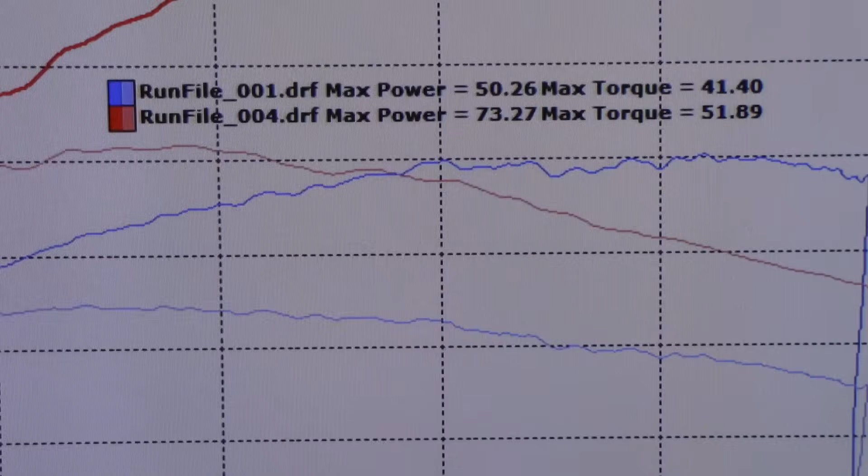But anyway, so then I decided, okay, I'm going to try 4th gear, and that is number 4, and whammo, 23 to 24 horsepower and 10 foot-pounds of torque. So that's how much this thing is shut off from the factory in 5th gear. Can you believe that? So I'll back it out.

Okay, so now you can see the graph. That's the blue line in 5th gear. Then the torque is the faint one way down there, and the red line is in 4th gear. 5th gear blue line, red line 4th. Look at that. Alright, well let's get on with what we're going to do today - every intake system known to mankind, test it with a stock bike. Pretty cool.

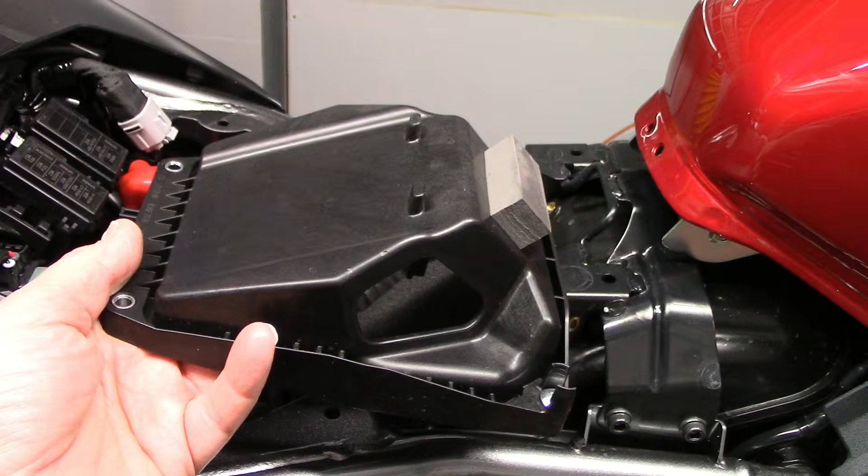Okay guys, it's a little bit of a pain. If you have a helper, you can pull the battery back a little bit. The front screws are captured, see they won't fall out, you just got to make sure they're fully unthreaded. And you can get a long skinny Phillips down in there without wrecking the screws. Otherwise take the battery up. But we were able to weasel this battery back, get it up just right and get it out.

The snorkels, actually I was able to push with a brand new wide screwdriver and collapse them and kind of yank on them, pull them out with the cover, filter cover still completely intact. So let's pull this foam out like everybody seems to do.

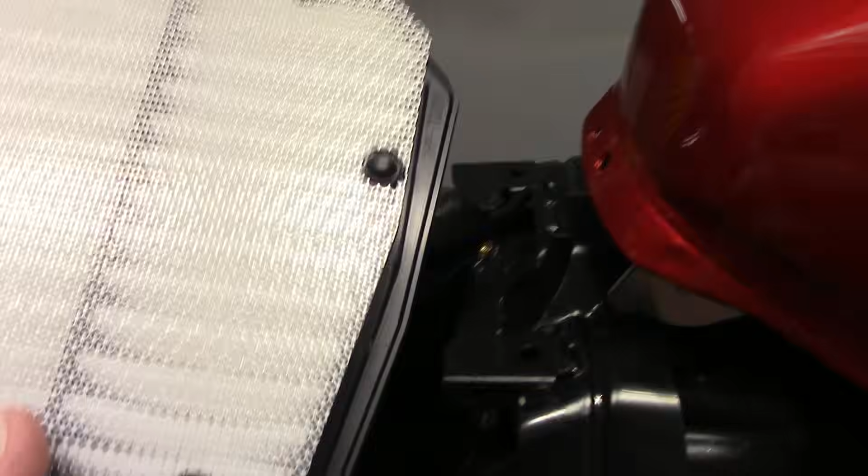Let's look at the stock filter. I'm going to take this screen that's also supposed to be a horsepower killer, nip these off, pull them off, and then nip them off so no debris can get in. Then we'll put this back in with the cover, no snorkel, and make some pulls.

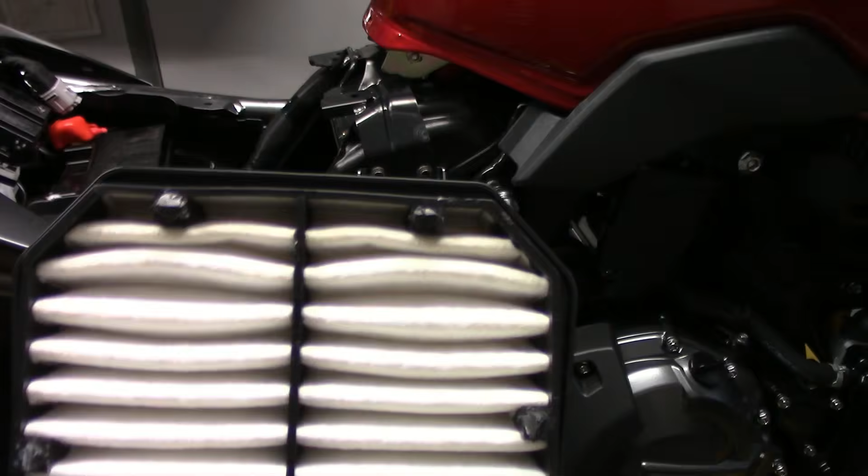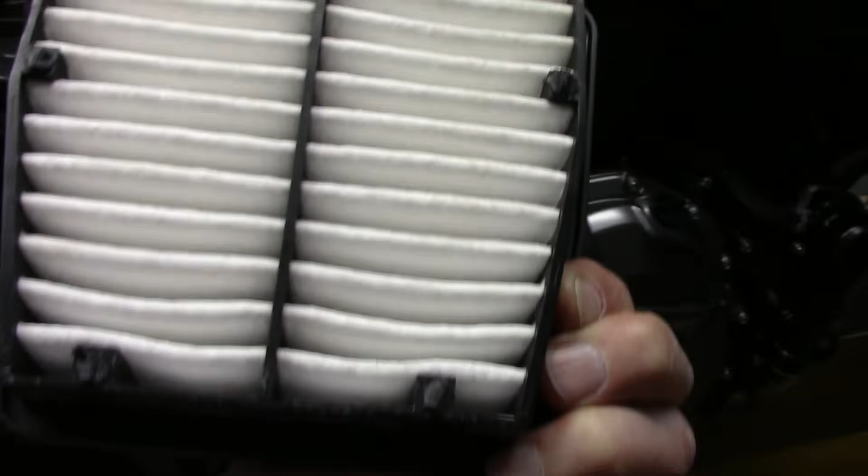See what my bike does here at 4,500 feet. Okay guys, here's the stock filter back, got the screen removed. I don't even think you need to nip those off, they look pretty clean. You just grab a pair of pliers, have somebody hold the filter forward, and roll the screen and it'll pop off those melted rivets. But I went ahead and snipped them off with a pair of diagonal pliers and blew it out a little bit.

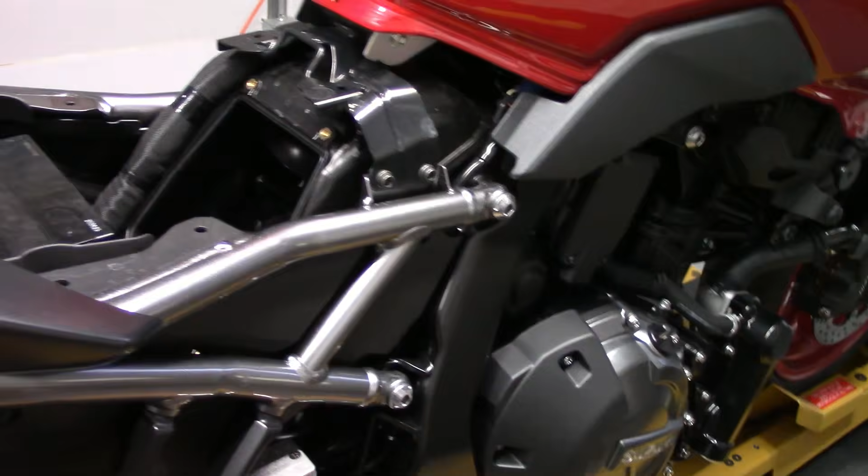So we're going to stick this back in with the snorkels removed and make some pulls. Let me get it together and we'll get at it. Okay guys, well we got the room about 73 degrees right now, should be pretty good range there where it liked it earlier. We got the air filter and air box just like I showed you a minute ago. So we're going to go ahead and make 3 pulls right now and let's just see what the thing does. 4,500 feet. Here we go.

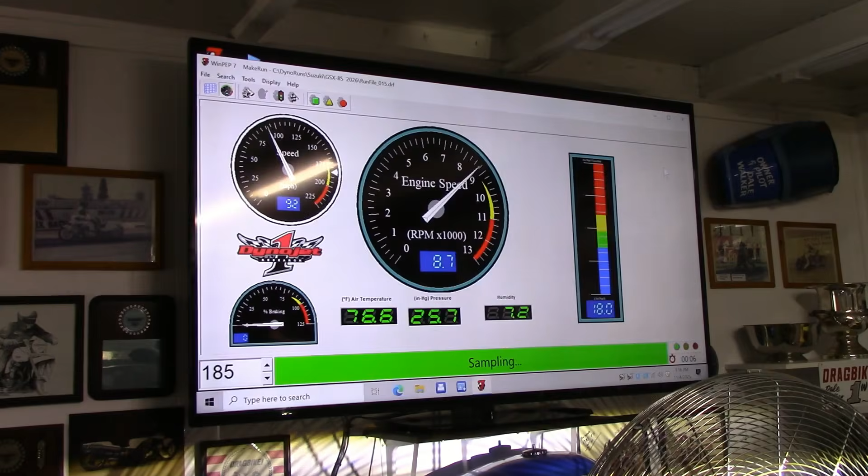Okay guys, so you look at that and say, wow, number 4 is one of the best pulls earlier with very similar conditions. It was 76 degrees in the room. When I got done with these pulls, it was 75.8 degrees, and humidity right on the money, 11% earlier and 11% this time in the room.

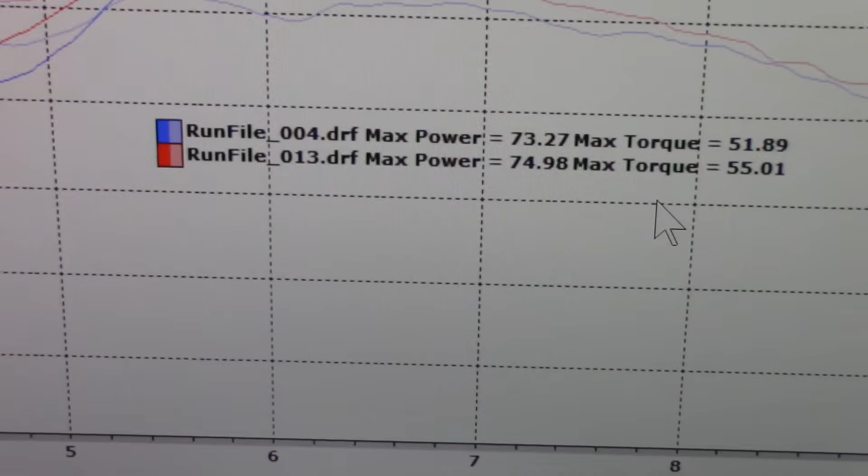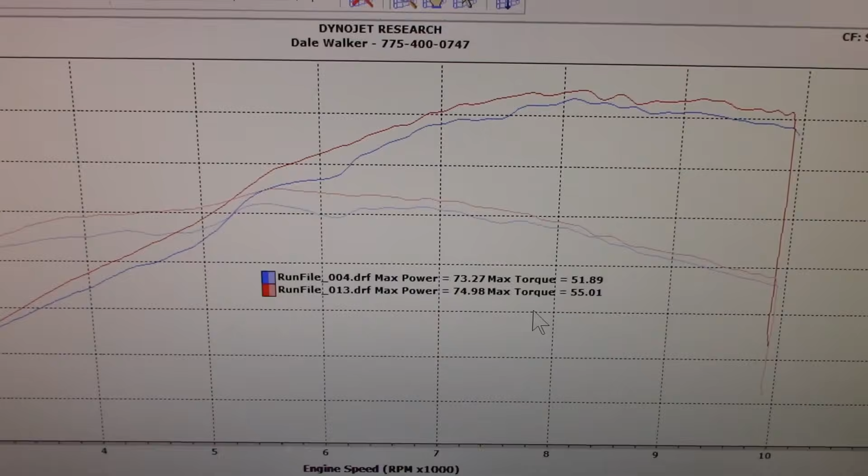So you look at those numbers and say, wow, the thing only made like whatever, right? It's still a pretty good gain right there. But remember, this is zero tuning, throttle blades still aren't open all the way. But look at the graph, so you go look at just peak numbers - that's not the whole story by any means.

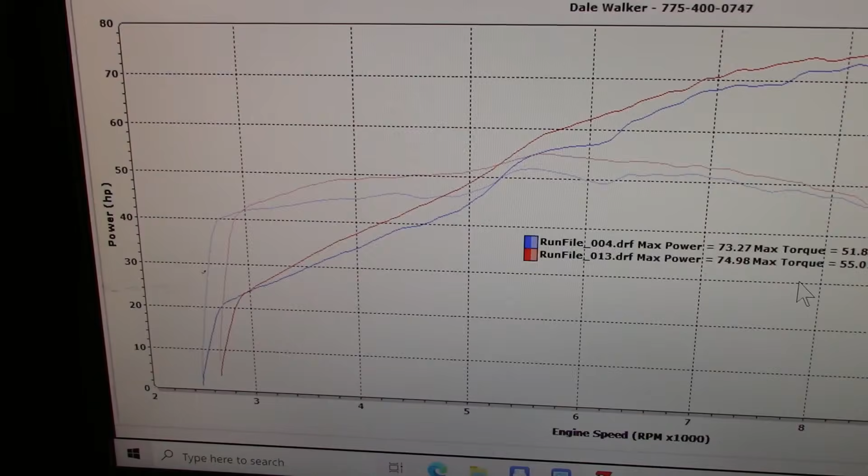So the red line is just now - that's with the stock filter still in it, with the lid on, no foam on the back, screen removed in the front, and the snorkel's removed. That's all this is. But look at the horsepower gain down here - that's about 5 horsepower, that's about 6 horsepower, that's at 5 grand.

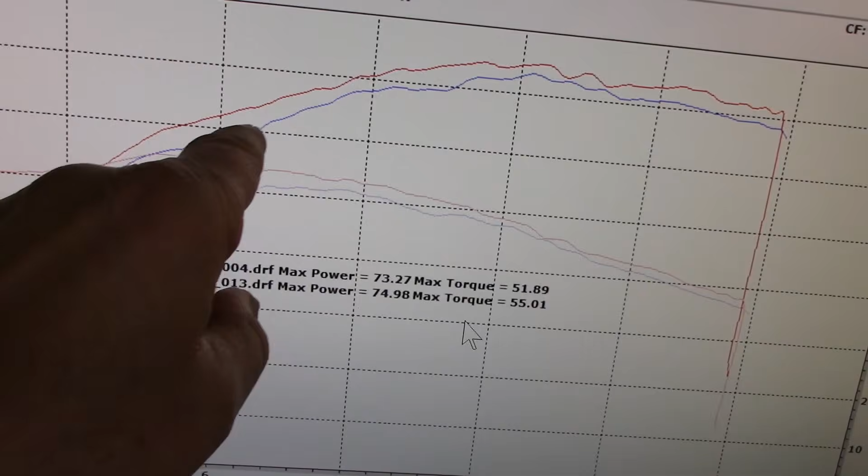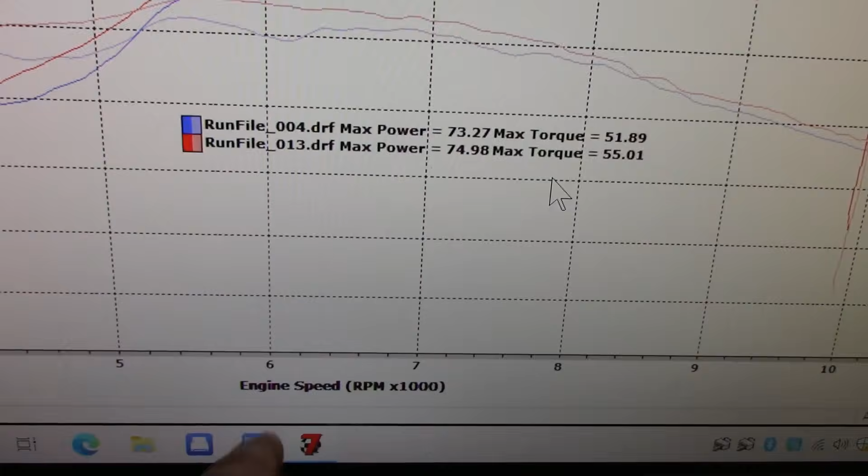Then the stock bike takes a real dip right here, and look at it up in here - that's about 7 horsepower, and that's at 6 grand, right there. See down here? I tried to do this right with the camera for you. And then it comes up, look at the horsepower line.

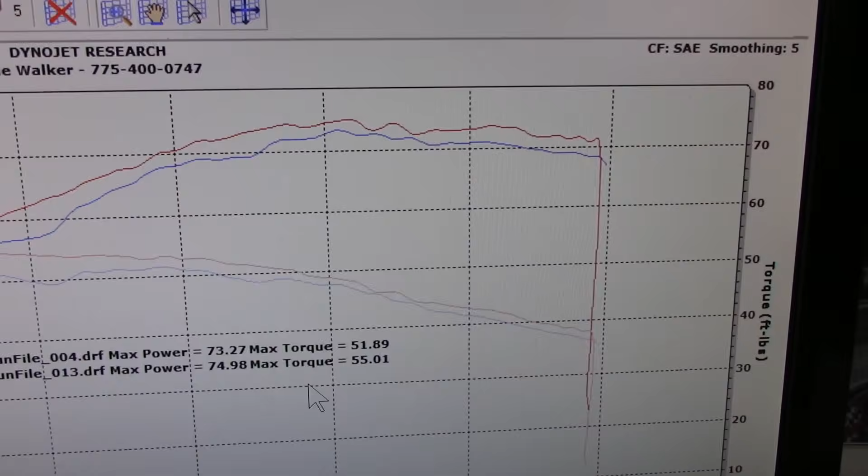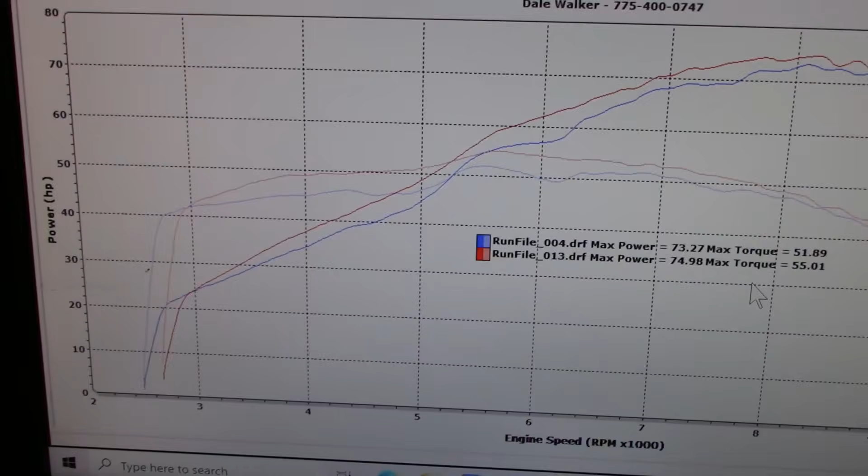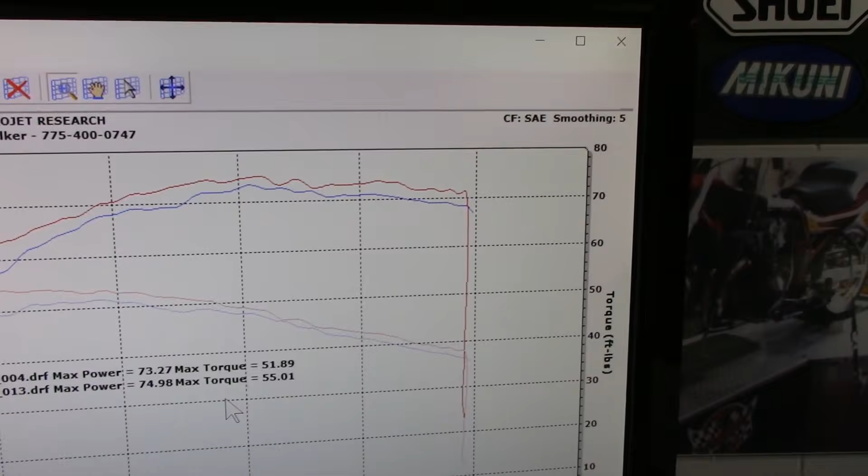So that shows you that absolutely this motor likes more airflow. So yeah, that's impressive, I think, you know. Still sounded fine, I can't put air fuel - I know it's probably 14.5 to 1, and probably still rich up top, probably under 13 slightly. But anyway, yeah, so now I'm going to take the airbox back apart.

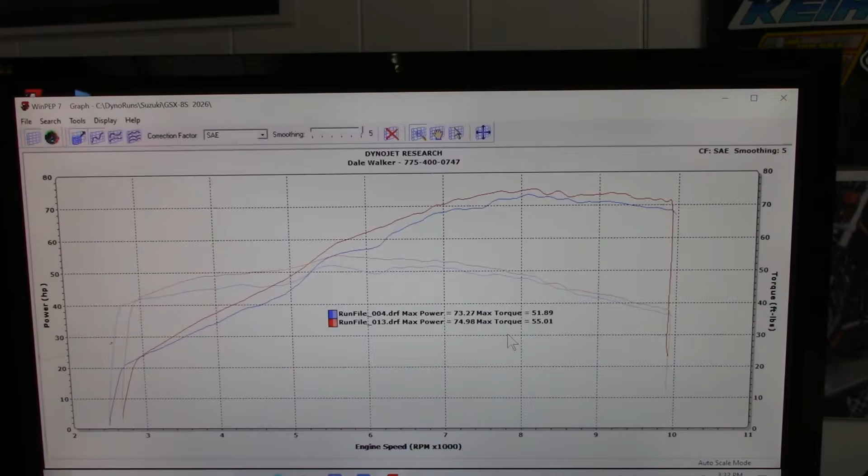I'm going to put the DNA air filter in it, the total open filter with the rim around the filter, and let's try that. But the key is to keep my room consistent. Okay, I did a 10 to 12 minute cool down, so it may take a couple tries to hit the numbers again at about 75 degrees when we start. So anyway, I'm going to get on with the work, and that's going to be the last test we do.

Okay guys, well, I'm here. Let's try the DNA filter, so you have every possibility combo you could try. K&N will work just as good with the airbox lid with no snorkel. Let's try that first. Snorkel's gone, DNA.

But I got to get the room temperature right. I'm going to make sure it may take me a few tries to hit it like I want, within 1 degree of what I just did, so it repeats accurately. Then we'll go ahead with the open rim piece that DNA sent me with the kit.

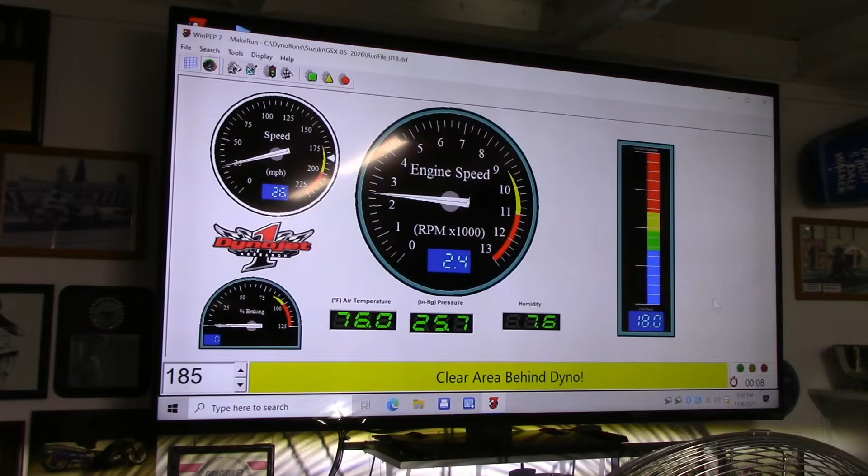Okay guys, that was 3 runs, but dinking around with it took longer, and the room and the motor, I want to do my 10 to 12 minute cool down. We got a few minutes to go. It didn't match the other ones, but it's damn close, okay?

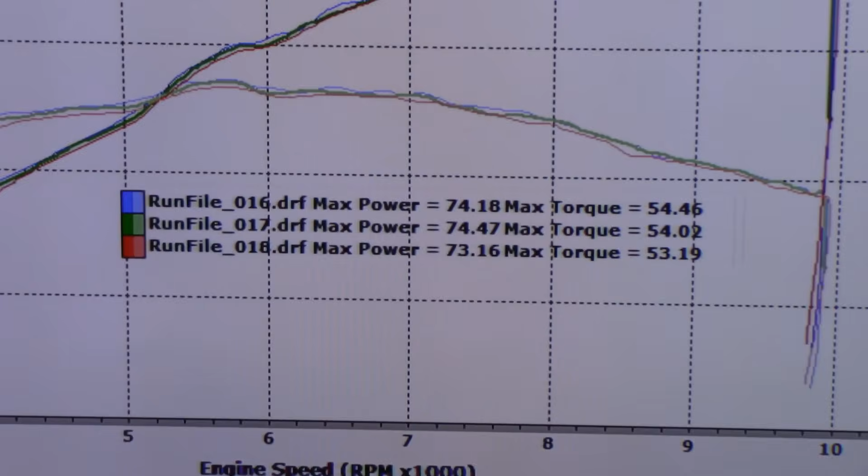But I want to do one more fair test. We got the room stabilized now right at 75 degrees. Yeah, but I want to do my 10 to 12 minute cool down on the motor. So we got a few minutes to go here, and we're going to erase these or get rid of them and make 3 more, see what it does. And then we'll move on to the open lid.

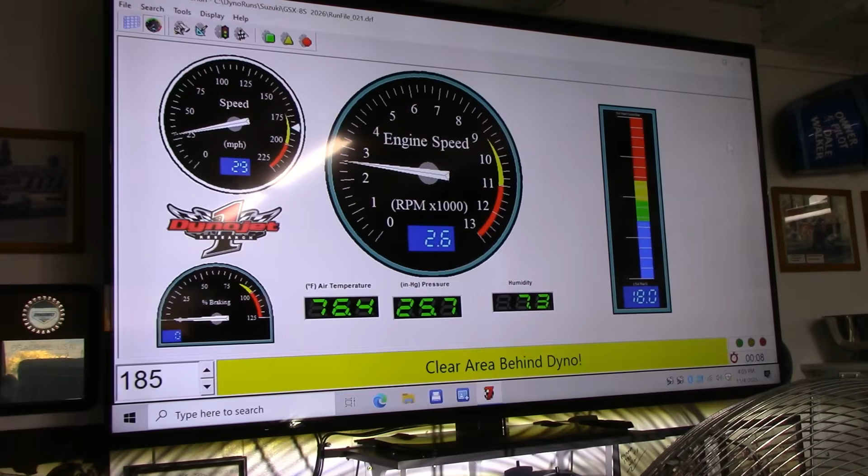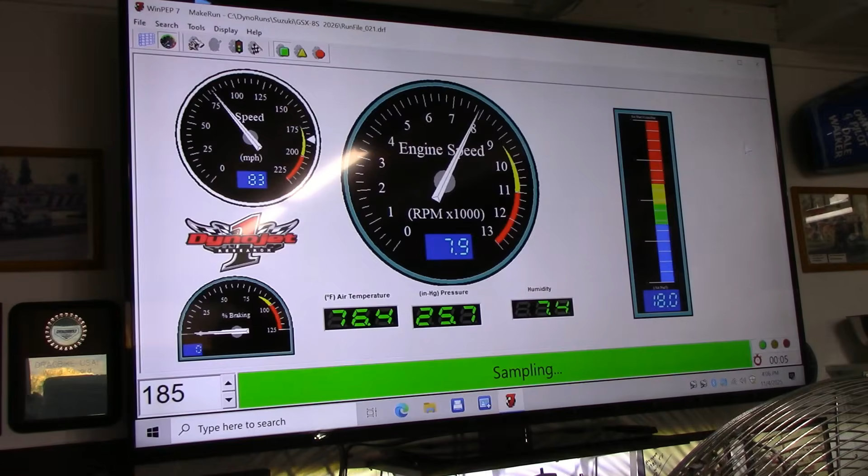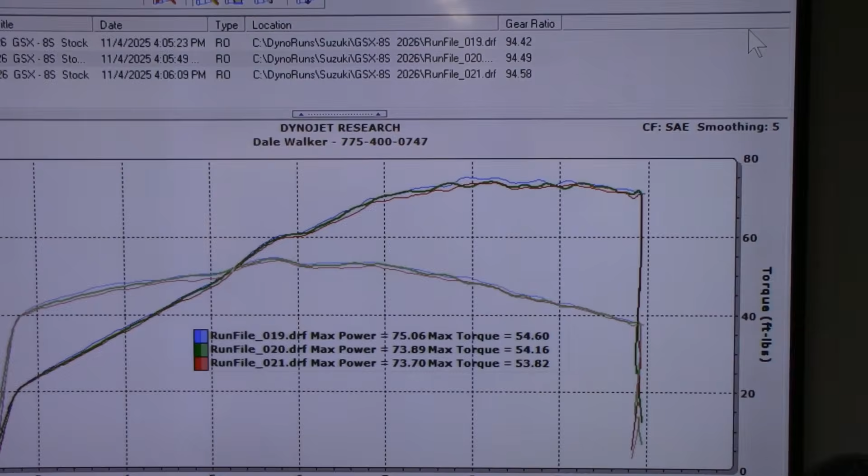Okay guys, well we broke 75, 54.6 foot-pounds. Then it dropped to 73. It's just the temperature's within 1 degree or so, you know. But anyway, so that didn't really hurt it or help it. It did make the 74.98, so that's 75. So it's right there how it is right now, set up with the lid on with the DNA.

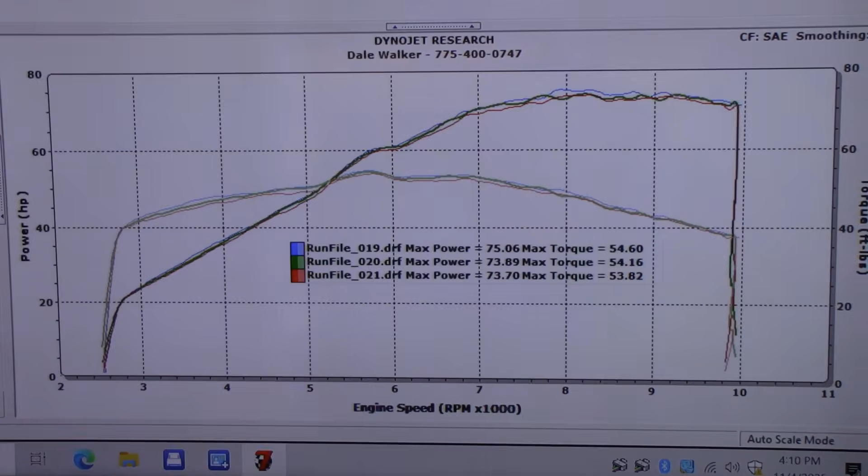So the throttle blades may be restricting it. We can only use so much airflow, but we may gain some more torque or something like that. So let's go ahead and get the stock lid off and the DNA outer ring holding the filter in.

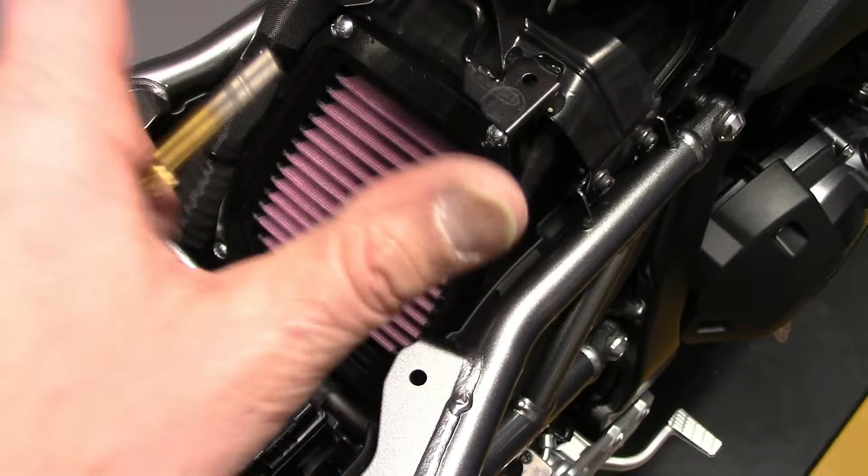Okay guys, if you buy one of these DNA expensive kits, on my bike the outer ring holes didn't line up worth beans. Too small, got the bottom 2 in, top 2 are way off. You're dealing with a formed plastic, a different air filter, blah blah blah. So anyway, if you start fighting it, don't, because you don't want to strip your bronze threaded inserts that are in your stock airbox.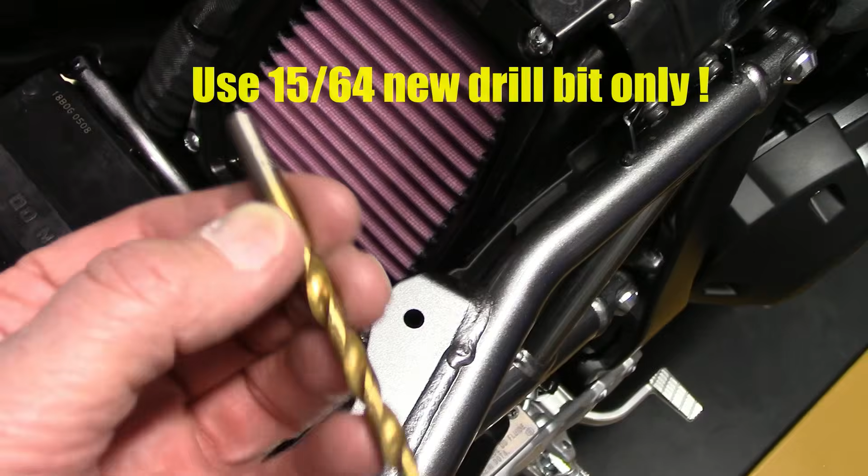So I went up twice on the hole, little at a time, in a drill press, and this is a 15/64, okay? Brand new, try to use a new bit. Hold it down flat, go real easy. You could also put it on a little block of wood if you want. And the plastic, luckily, is not brittle. It will drill out. Then blow it out all clean.

15/64, and now I got them all started. They're not bound up, and they're all snugged evenly, but that's what you got to do. So there's a tip for you.

All right, because of that, now I've got to do some series of pulls with the temperature and all that good stuff. But this may not help anymore. Now we're getting to the point where the throttle blades may not be open enough to take advantage of this extra air. But only one way to find out, so let's start in.

Okay, this is the kit that includes the DNA filter and the ring. And that's the part number. See, combo. Again, if you have trouble with the screws, drill the holes out like I showed you.

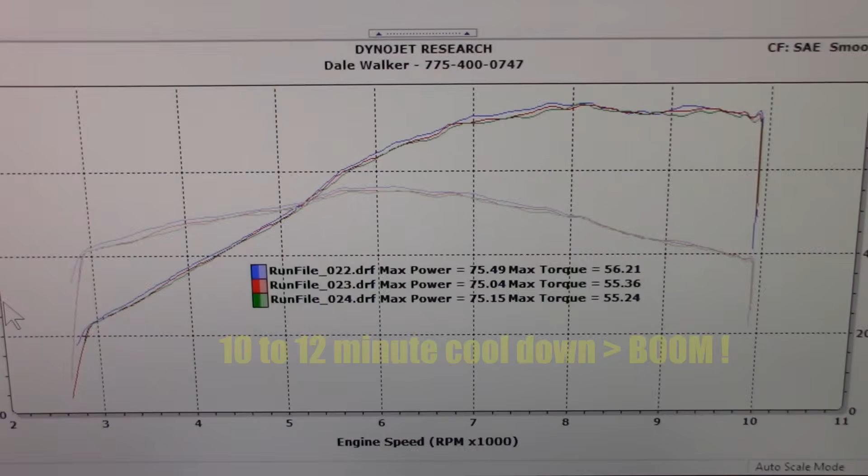Okay guys, the open lid DNA ring with the DNA filter is impressive. You got to remember, stock bike, throttle blades still aren't open all the way, and you can't just go by this number though, but that's the first time it repeated 75 horsepower in a row. It's happy, and over 56 foot-pounds of torque on the first pull.

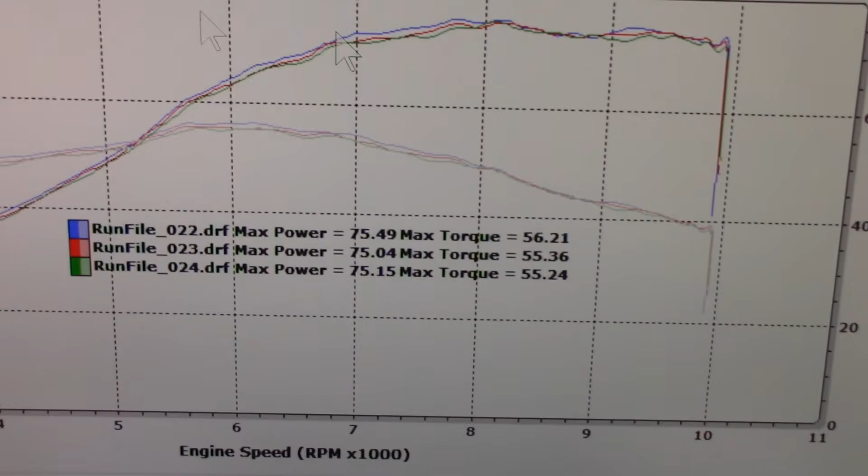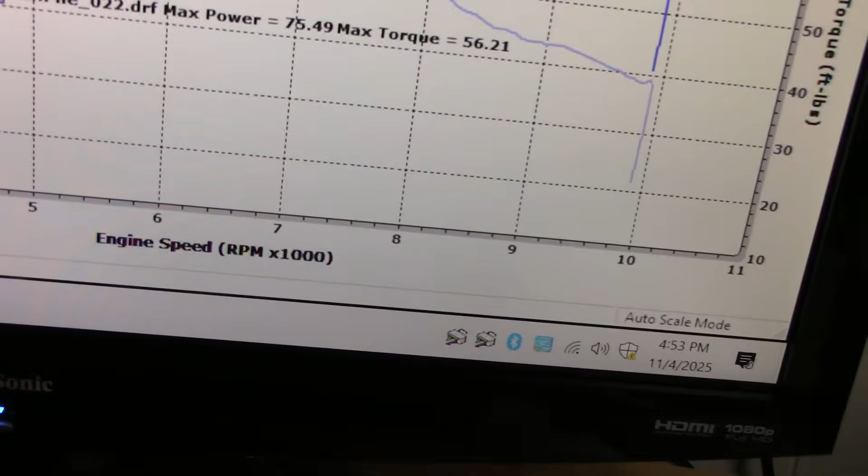So I'm going to hold this with my left hand and shake around a little. I'm going to get rid of the 2 runs. Okay, just show the first one, the best one of that session. And then we're going to go down to, I think it was, yeah, number 19 was the best one prior. Sorry, over here.

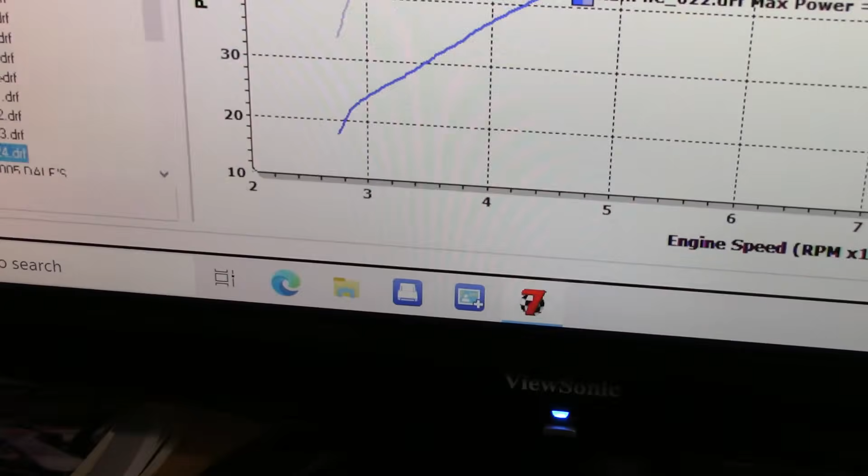Okay, so now the red line is 19. Hang on, I'm going to grab the camera again and move the cursor. So the red line is 19, and that's with the stock lid, no snorkels, with this DNA filter.

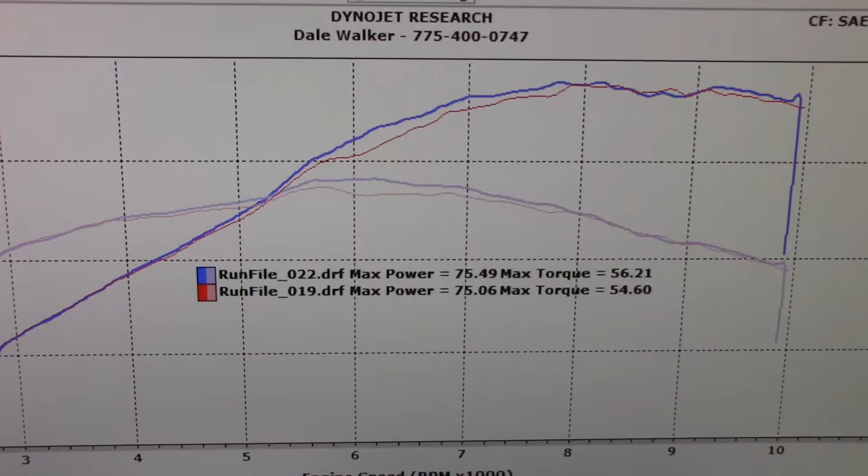That's just peak power at 8,000 RPM. See right there? But look at the difference. And what's nice, it's still smooth coming up here.

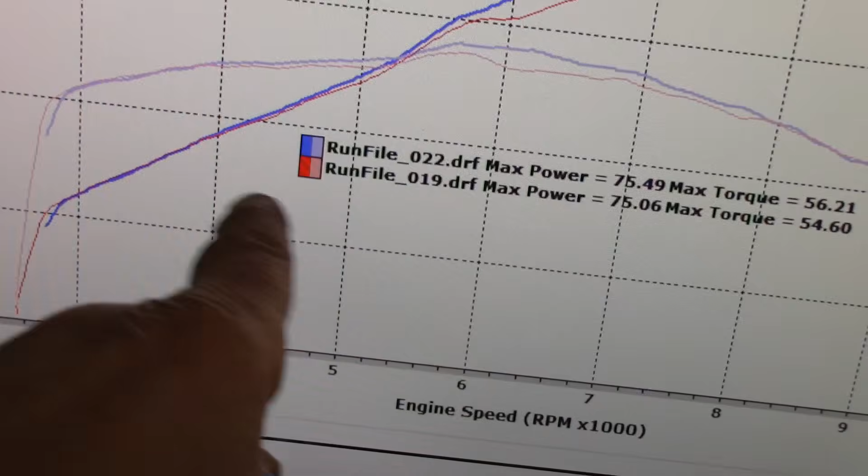This is 3, 4, 5 grand, right? Horsepower, torque. But right here, the torque starts to climb about 4,800, and the torque corresponds with the horsepower. This one, it's really, really nice that way.

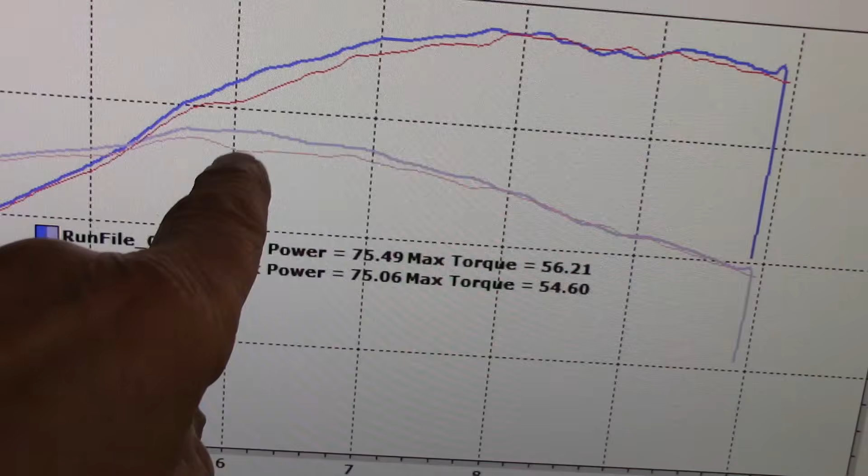That's about 5 foot-pounds more torque at 6 grand, right there. 4 or 5 horsepower also. And then it holds it. Here's...

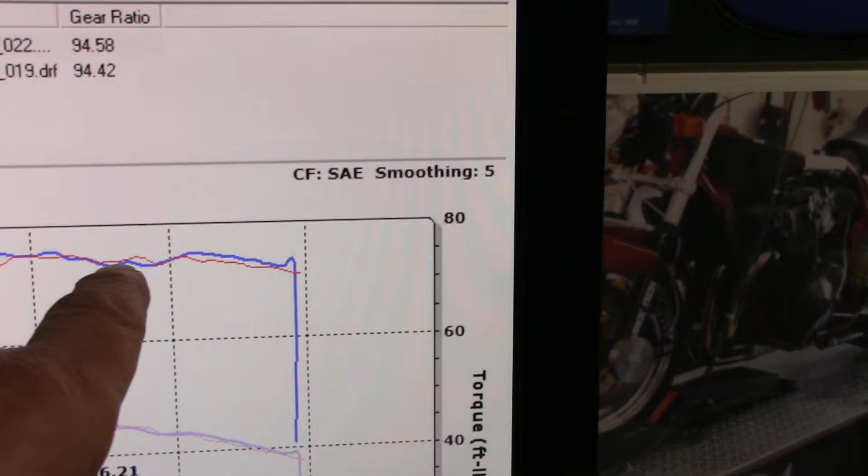See on the bottom, 7 grand, right here. But look at the difference with the lid off right up through here. Then the butterflies are probably closing down. They're not open all the way, and basically it still beats it a little here, but that could be also by the muffler restriction as well as the butterflies, right?

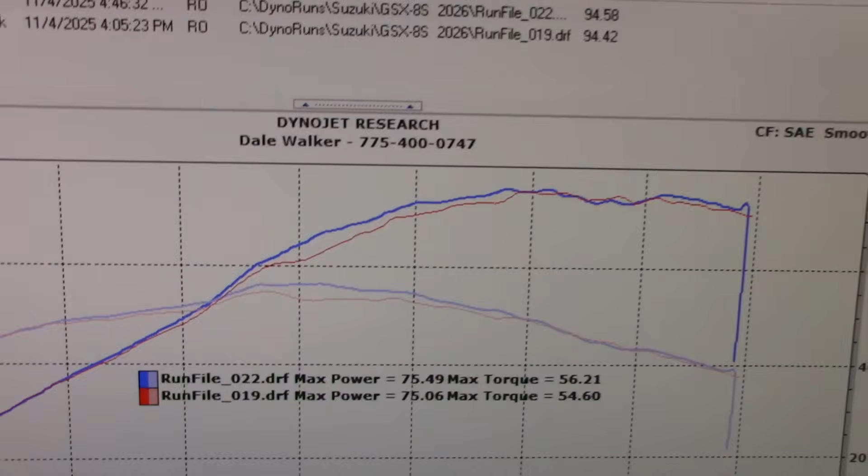But that shows that's a good investment if you're willing to spend the money. Because if you put a pipe on this thing, this is the way you want to go.

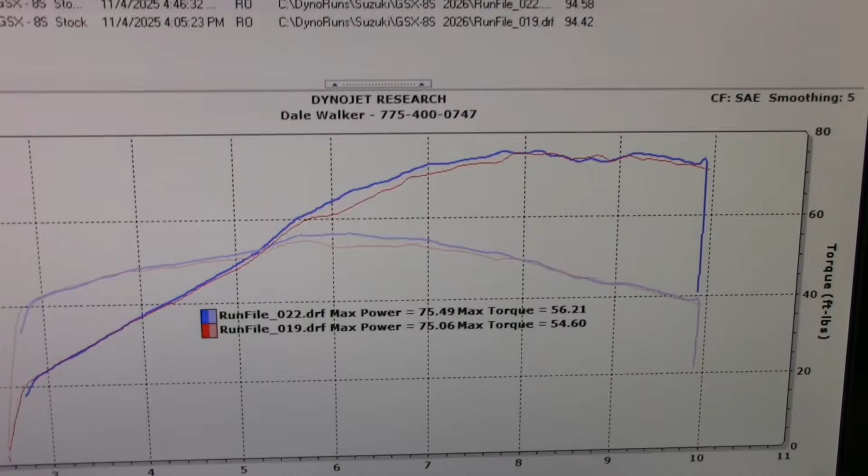There's other kits. The next one is the TST Velocity Stacks, but they hurt it in some areas, though they make a couple more horsepower. But you know what? I just decided I'm not going to do that. I'm just going to do this setup.

I have a brand new Black Widow full system with the muffler I like. We'll try it with and without the DB killer, and then maybe I can modify the DB killer a little bit. And Nate's flash for this airbox setup.

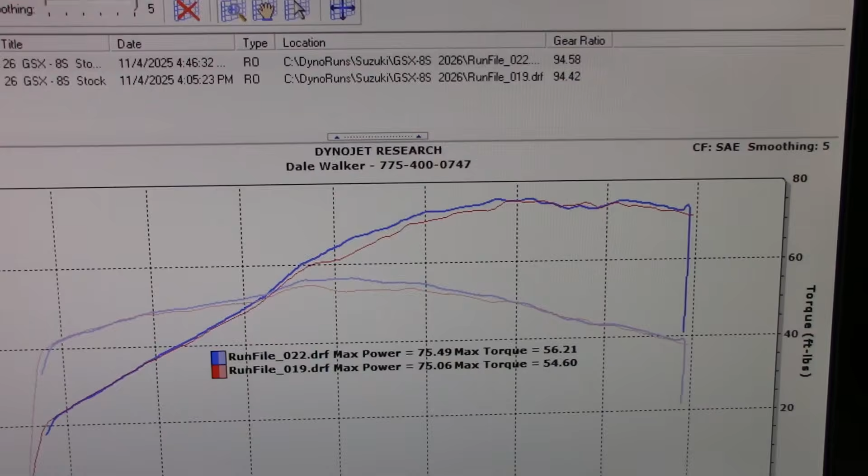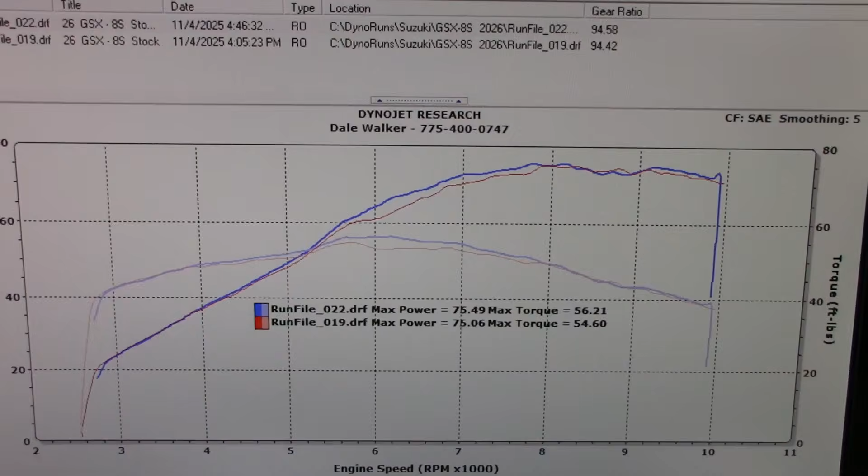But that's a race bike then. You don't need it on the street. I think this is the most cost-effective setup.

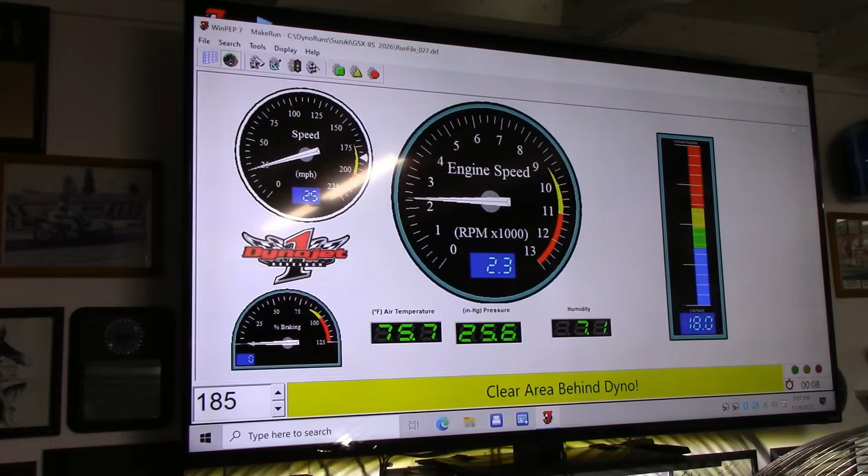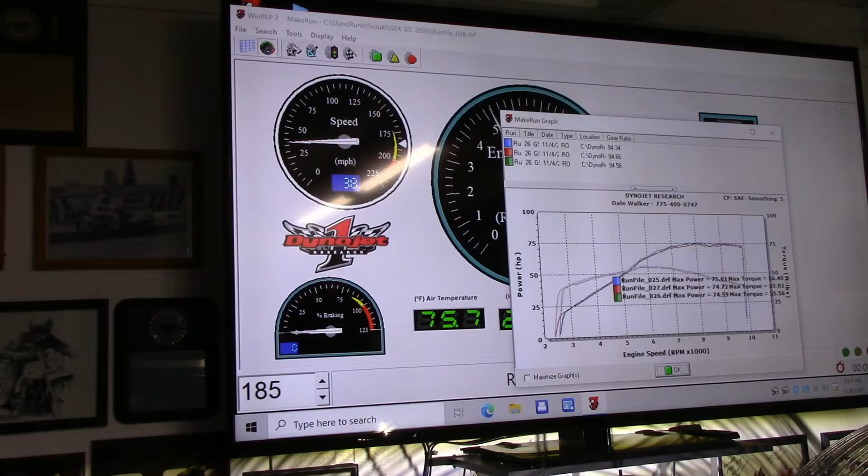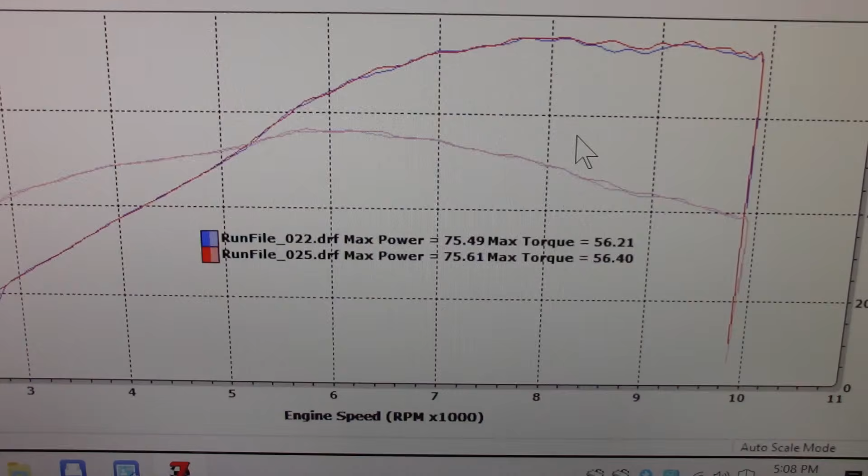Alright guys, well that's about all it had in it. So number 22 is the best of the first session. Number 25 is the first pull of this session here, and it's exactly the same. There's a little blip up here where it made 1 horsepower for an instant. But that's about what you're going to get out of it, the way it is right now.

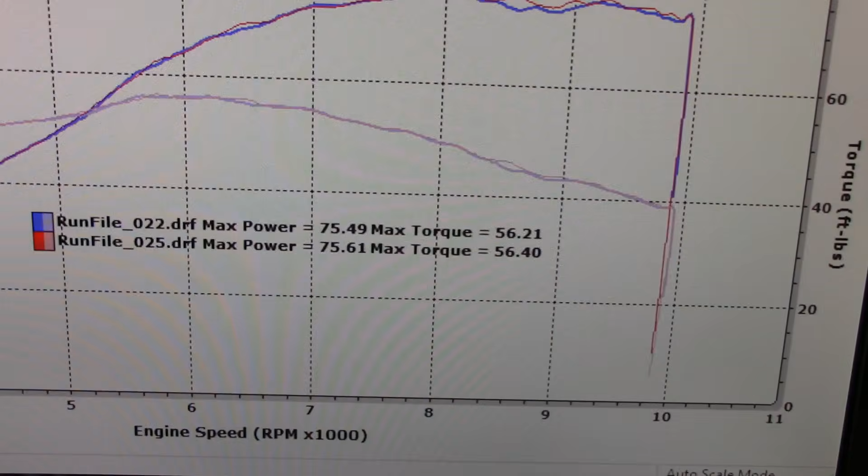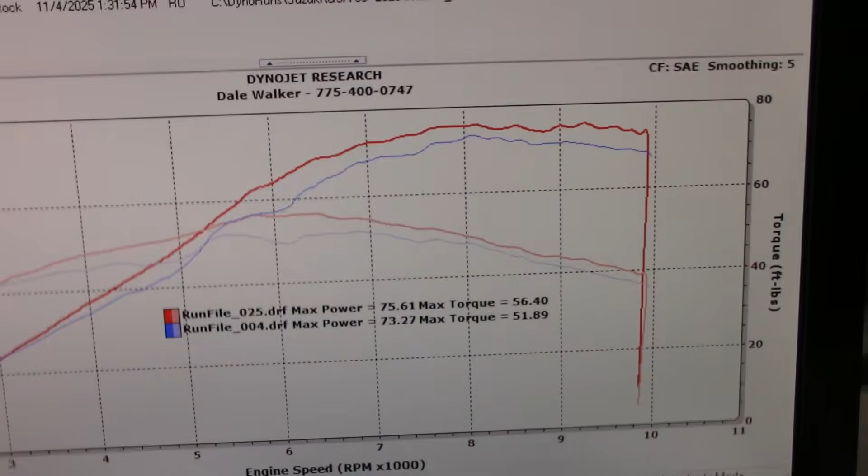Hang on, get my hand out of this camera. So let's just put apples and apples. We're going to do number 25, and we're going to do number 4. So here is the stock bike, that's the best, one of the best pulls is number 4, okay?

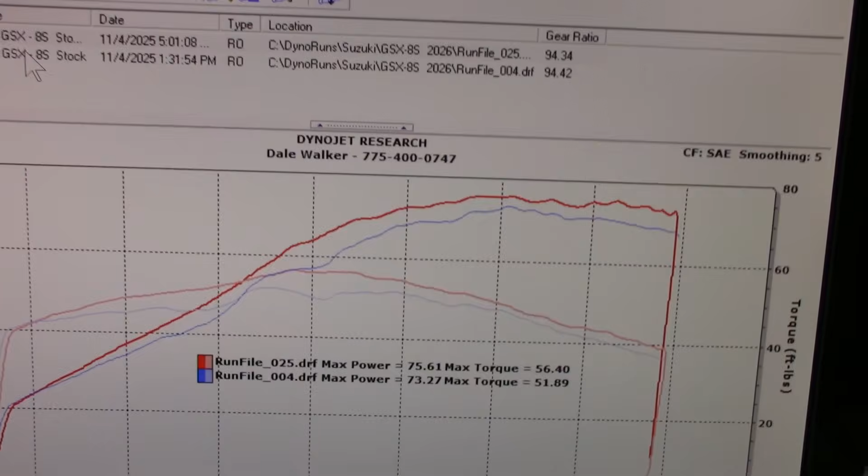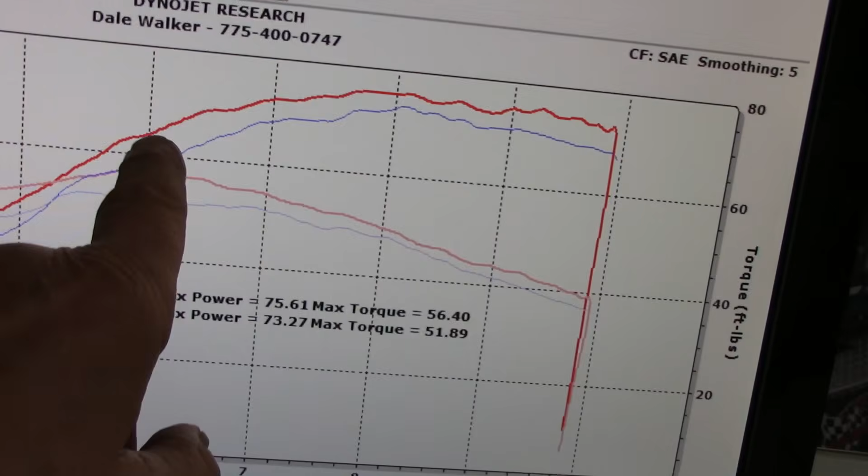And this is the best pull just now with the DNA filter and the open lid. That's huge, and that's no tuning yet. So look right here, that's about 7 or 8 horsepower right there. Each one of these lines here are 5 horsepower, right? So that's about 7 ponies right in here from when we started with doing nothing.

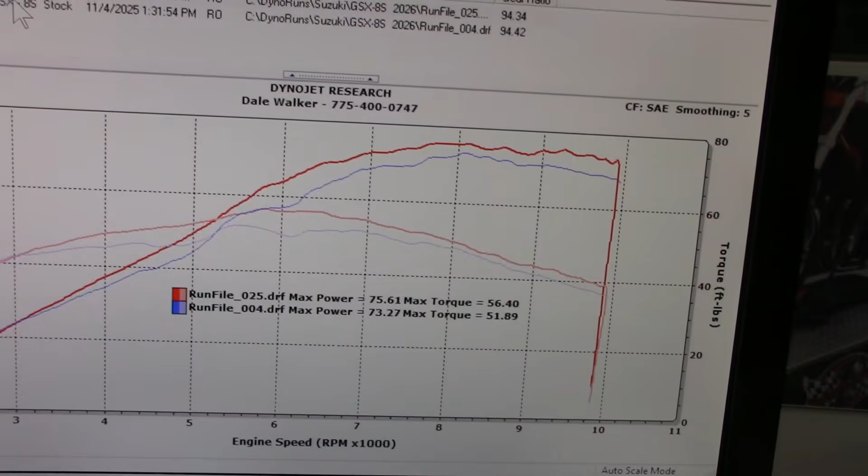But it's kind of cool, I wanted to do this for you. I know guys have done this, but they've done it over time. I did it all in one day with my same bike, and I tried to keep the room as consistent as possible.

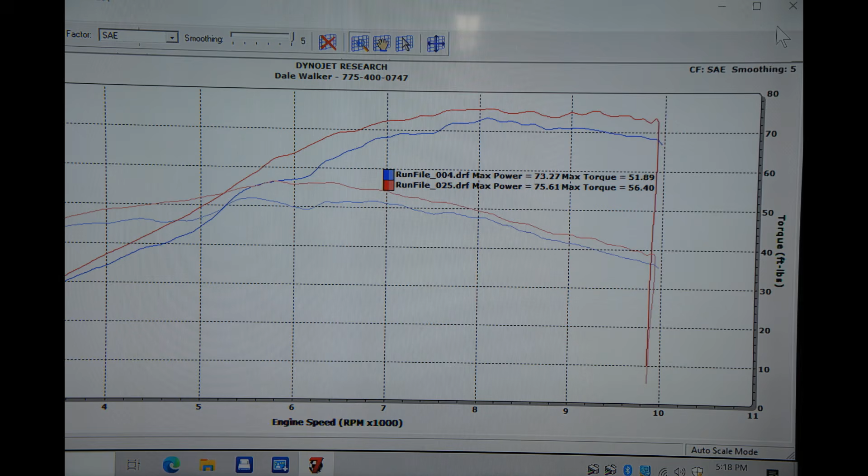Okay guys, well I hope you enjoyed the day doing this with the 8S. I think it was very informative, and the next step I'm going to do is pull the whole back end apart, take out the ECU, and send that off to Nate and have him do this one too.

He's got my Hornet ECU, will be with him any day, and like I say, I like how he buys the bikes, owns the bikes. A few other people do wonderful jobs too, but I'm just going to send it to him. They have a sale right now, 50 or 80 bucks off, so I'm doing both.

So got this out of the way. Next I'll be putting the full system, Black Widow system on it. Fender eliminator kit, tidy tail, the ECU's off. I need to order a radiator guard while it's pulled down, and a few other little tidbits.